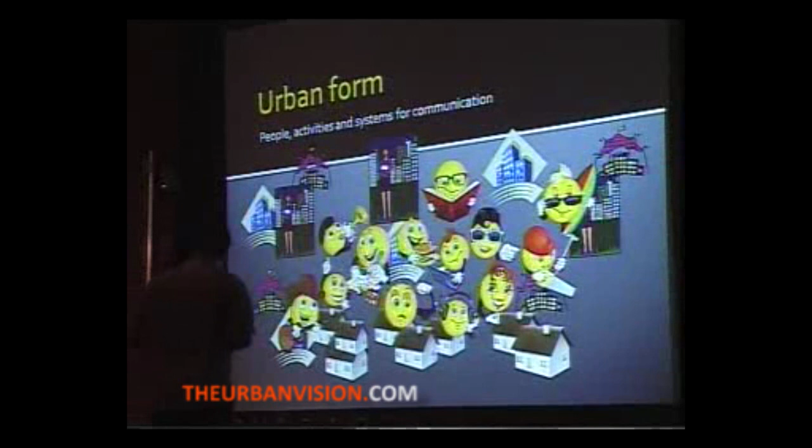So a city consists of people who are up to something, who are doing something or the other all the time, and these activities then generate spaces, form in a sense. So that's how urban form sort of evolves. And in most of our cities, we see that happening in a very chaotic, though interesting way. And then, all these people, activities happening in different locations need to communicate with each other. So you have all sorts of connections between people, some physical, some moving. So you have Bangalore, fairly chaotic urban environment.

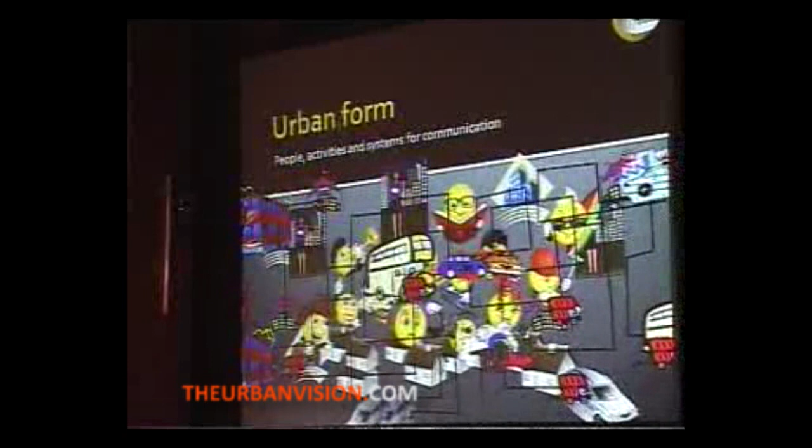Now, the topic that I chose to focus on for this presentation is how to integrate the principal means of communication, which is transportation. Even though we have mobile phones, we would rather meet people face to face. Goods have to move. So, transportation still remains one of the major forms of binding a city together. Land transport and land use, which is just a fancy term that we planners use for what people are up to in a city. So you have activities spread all over the place. So what is land use transport integration?

So this can also take many forms, and I will choose to restrict my presentation to one form of land use transport integration, which is aligning higher order land use and greater densities along corridors of greater access and higher capacity. Just to sort of decipher that a little bit, when I say higher order land use, what I mean is those land uses which attract more people, more goods, consume more energy. There is a lot happening in one place.

So it could be a garden which is visited by thousands of people every evening. It could also be an office complex with thousands of people working there. It could be an educational institution where lots of people go. Those are all higher order land uses, and it also includes high density residential spaces. So if you have a high density pocket of housing, say an old city area, like Chandni Chowk in Delhi, or Chickpet, which is a high concentration of both residential and commercial. All those to me are higher order land uses.

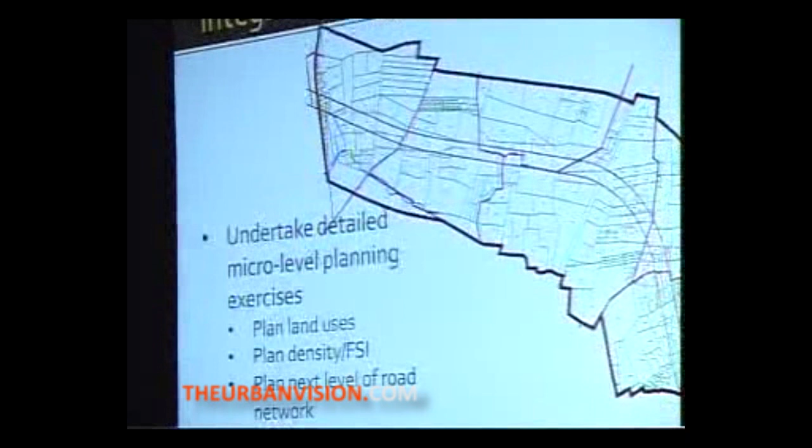Now the example that I'm going to use to explain what needs to be done is from a city familiar to most of you. If you recognize it, just keep quiet, because I don't want the specific location to interfere with the idea that I want to communicate in the next few minutes. Now the two red lines that you see in the middle are the alignment of a major arterial road which is proposed in the city. And those green lines that you see, those are agricultural land holdings.

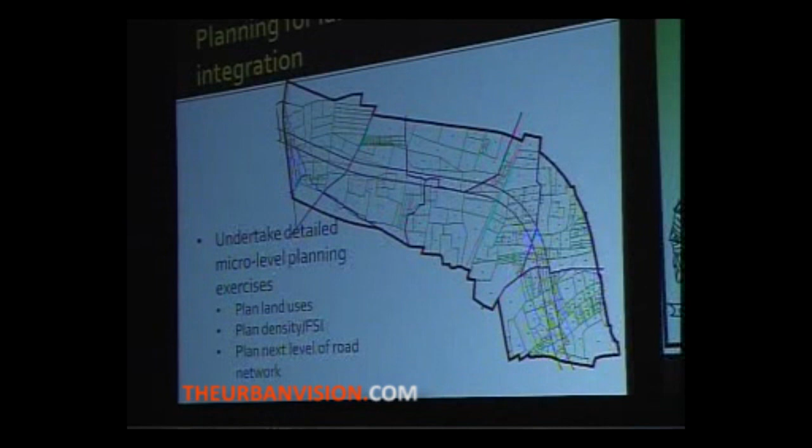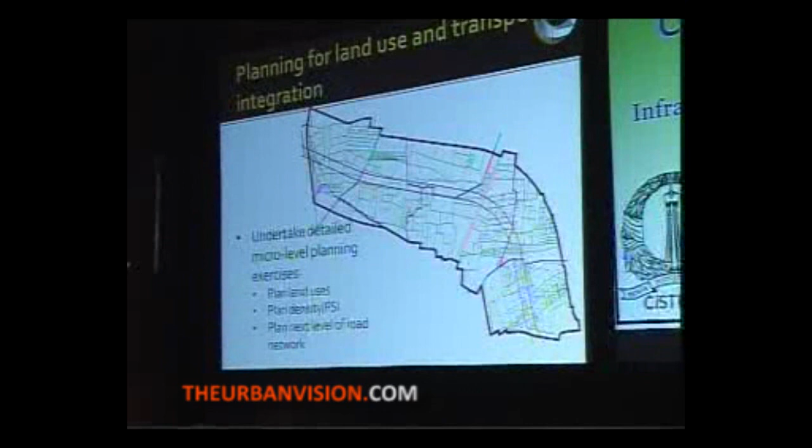Some of them might have already turned residential, but they're mostly agricultural. So from the pattern of those green polygons, you will see that it's a haphazard layout, which works well when you're doing agriculture, but will not work when those plots start getting used for urban uses, when you start putting up apartments and office buildings on them.

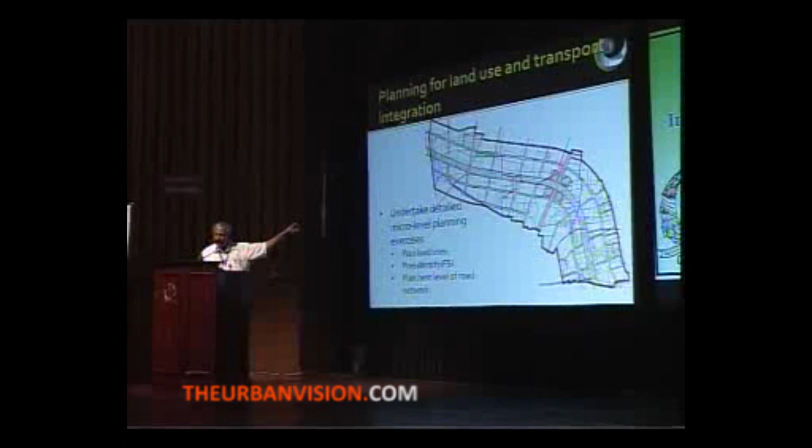Now, this exercise we did as a conceptual exercise to convince somebody to use a technique which is very popular in Gujarat and has almost disappeared in Maharashtra, called land pooling. The term they use there is town planning schemes. I have a friend in the audience who spent many years in Gujarat and even tried to make some software to support this, if I'm not mistaken, right?

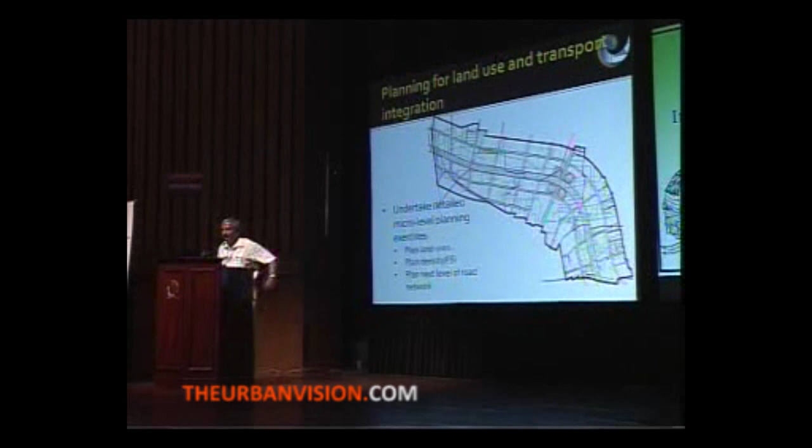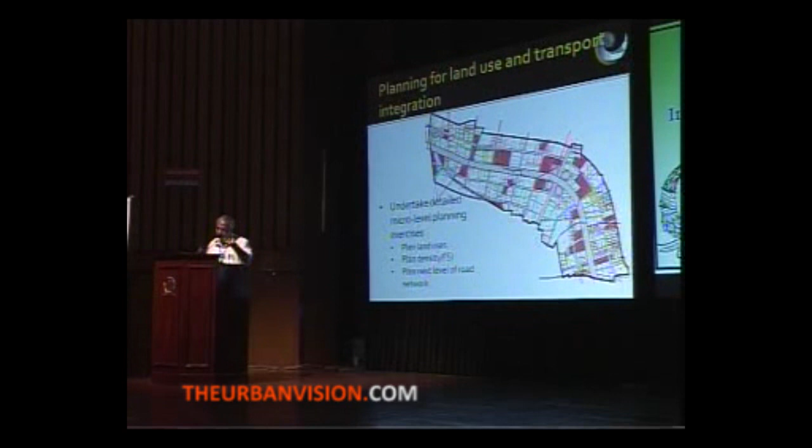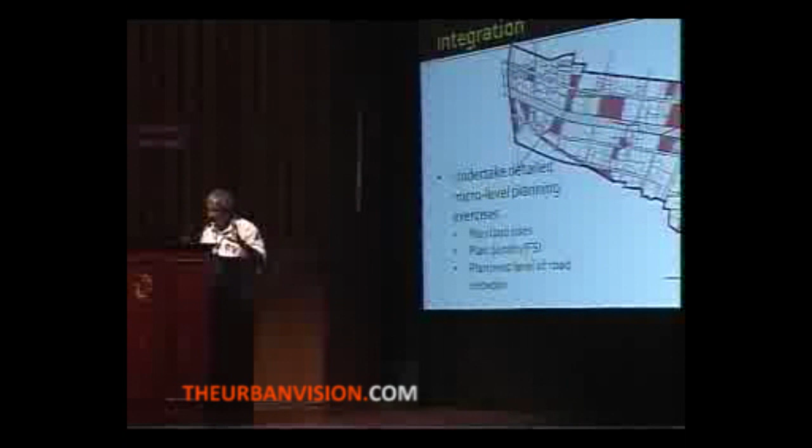Now what they do in Gujarat is they mark out this patch of land and they reorganize the land holdings, taking a portion of land away from each plot. So if you had 1,000 square meters before this planning exercise, you would get back maybe 600 square meters. You would lose 400, but the 600 that remains with you will have a decent shape, will have access to a road, and eventually will have access to all the infrastructure that comes with a road.

Now, all those patches of red, the plots that are colored red, those could be plots which are taken away or generated out of this land pooling exercise for public facilities. Having done this, now this is only two-dimensional. Now we have talked about densities. So if you want to influence density, then you get into the third dimension.

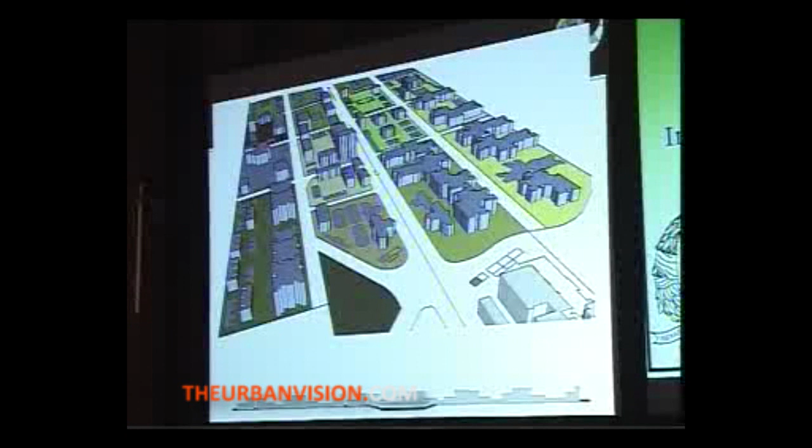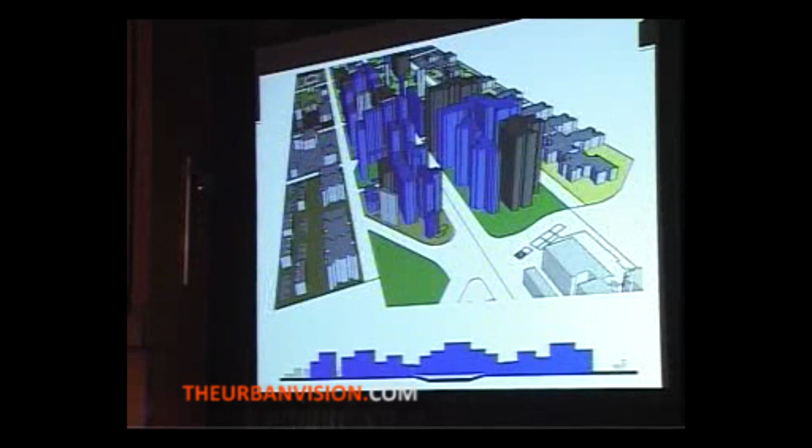So to start with, you say that as a matter of right, the same density is applicable in the entire area. Now these are roads and blocks here, building footprints you can see. So this is the matter of right density, meaning everybody gets the same. Then along the transportation corridor, you allow a higher density and charge for it. So if you call it FSI, then this is the saleable FSI.

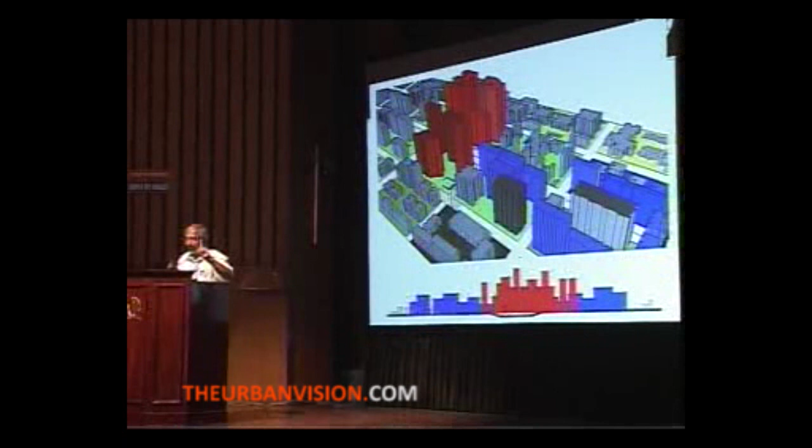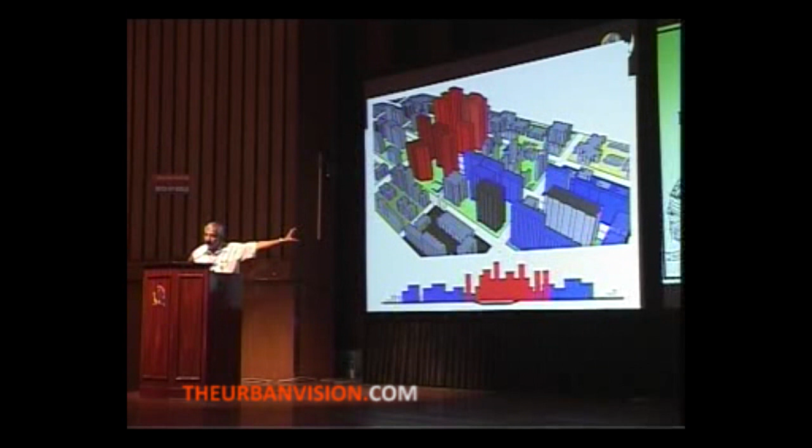And not just that, you go to one more level and say where there is a transportation node, like a metro station, or if it's a bus rapid transit system, then a major bus stand, around that you give an even higher FSI and you charge more for it. Now the money that accrues from this sort of a regime, you use that to build the infrastructure that is really required there. It's actually possible to integrate principles of urban design and landscape design at this scale if you use this sort of an approach.

You can create more space in the public domain, which includes, as I said, pedestrian pathways, bicycle tracks, etc. Plazas and community spaces can be created, street vendors and hawkers can be integrated. Now, to implement this, you can use various approaches, but what we always recommend is a land pooling mechanism with or without transfer of development rights. And in that land pooling mechanism, you can even create land banks for value accrual to the authorities. It can be a means of financing.

The additional development rights can be sold, and you can create regulation to enable market action, meaning all this can happen with government not acquiring land. And this has been demonstrated time and again very effectively in cities in Gujarat. Ahmedabad is a classical example. They built an 80-kilometer long ring road around the city without acquiring an inch of land. It was done completely using land pooling.

And land pooling also creates an opportunity to do a participatory process. I mean, you don't have to evict anyone, and you can actually involve people in doing this sort of planning. And it works financially also. We had done an exercise in Pimpri-Chinchwad, where when they were planning the bus rapid transit system there, we realized that the city can actually generate 7,000 crores from this sort of land use transport integration. With that I end.